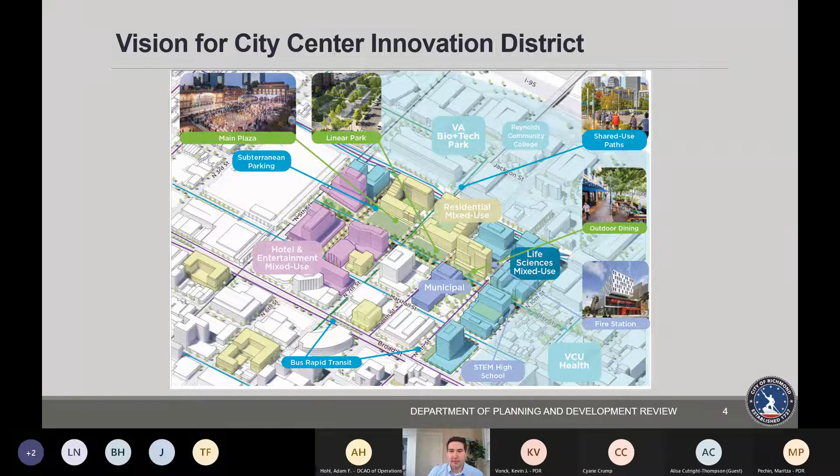I provided some more historical background of the zoning in previous presentations, but it really showed how this area used to be multifamily, but then it got rezoned over the years as we brought in the Coliseum and the Research Park. So really from the 1979 zoning map, this is the same zoning that's been in place since 1979. So it's due for a rezoning.

As I mentioned about the Richmond 300, the future land use plan, this calls for downtown mixed use along the vast majority of the western portion of the study area, which really encourages the mixed use. So you have your residential and your office, commercial, other things of that nature, but a very high density, walkable, pedestrian scaled environment. Going back to the zoning, the CM and the RP districts don't even allow residential at this time. So just changing the zoning to be more in line with the future land use categories of this area was one of our main goals here.

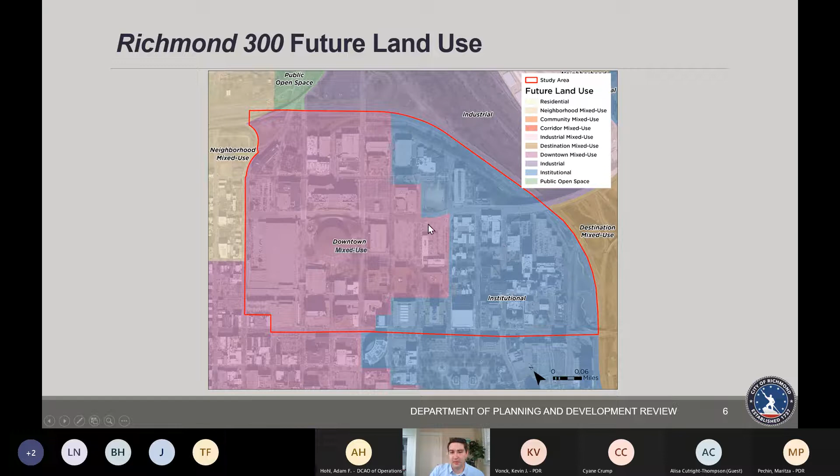One of the first things we looked at as we were developing this plan was what uses were permitted in each of the existing zoning districts. As you can see here up top, here are the main zoning districts that were identified in the existing city center plan, with the exception of the DCC, the convention center. We do not anticipate any changes to that zoning district. So we just included the B4, the CM, the RO3, and the RP.

So we looked at the main uses that are either existing or proposed in the city center plan, and looked at all these boxes that have the P in it, which is the permitted principal use in the district. If it has the green box, then that means it's allowed by right, as long as you can meet some other feature requirements. But if it's not permitted, then it would require a special use permit. So you can see, as I mentioned, in the CM and the RP districts, it doesn't even allow residential at this time.

So we were looking at these uses, and as you can see in the RP, it only allows for commercial as an accessory use. So in those large research facilities, you're allowed to have an accessory convenience store or restaurant, but you can't have a standalone restaurant in that zoning district. So this kind of allowed us to see what is there, what's allowed by right, and what would be done through a special use permit from a use standpoint.

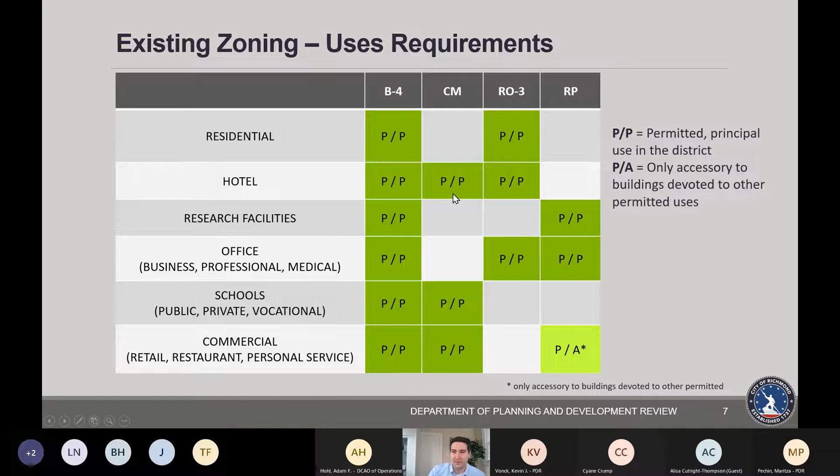But then we also looked at the feature requirements of the zoning district. So four of the main features we thought would have an impact on this area are the height limit, the floor area ratio, the fenestration requirement - that's your doors and windows to allow you to see in and out of the building - but then also your usable open space. That's a relatively new feature requirement that has been added to the zoning ordinance that really encourages usable open space.

So it can be balconies, a roof deck, green space, pretty much anything but building area or asphalt for driving. So these are kind of what we're looking at now.

The B4 has no height limit, but there is the 1-to-4 inclined plane requirement, and it has an FAR of 6.0, fenestration requirements, and usable open space. The CM district has a height limit of 80 feet, but no other feature requirements. The RO3 has the inclined plane, floor area ratio, and fenestration/usable open space requirements as well. The RP, similar to the CM, just has a height limit of 120 feet, and no floor area ratio, fenestration, or usable open space requirement.

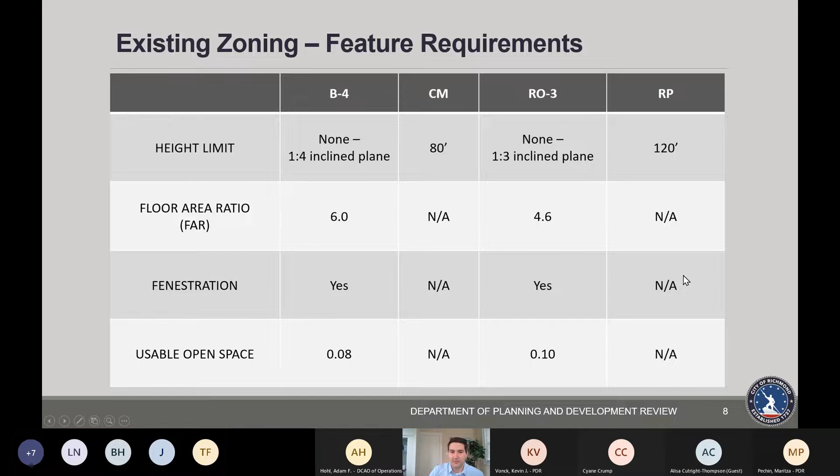When we met back in April, we realized that adding all these uses to the revised RP district, rather than creating a new zoning district as the city center plan called for with an innovation district, made more sense. We had an existing district there, the RP district, the research park district, where if we amended that zoning district to add the uses identified in the city center plan, we could expand it rather than creating a completely new district. The last new zoning district we created was TOD1 for the Pulse Corridor plan, but we didn't have an existing district that met all our criteria then. For the city center plan, we know what uses we're looking for and the feature requirements.

So that was our reasoning for this change. Going back to the feature requirements, this is what we proposed and presented in the first public meeting and also to Planning Commission on April 18th. Our proposal was to have no height limit and no inclined plane, but potentially have a floor area ratio requirement of 8.0, along with fenestration requirements and usable open spaces.

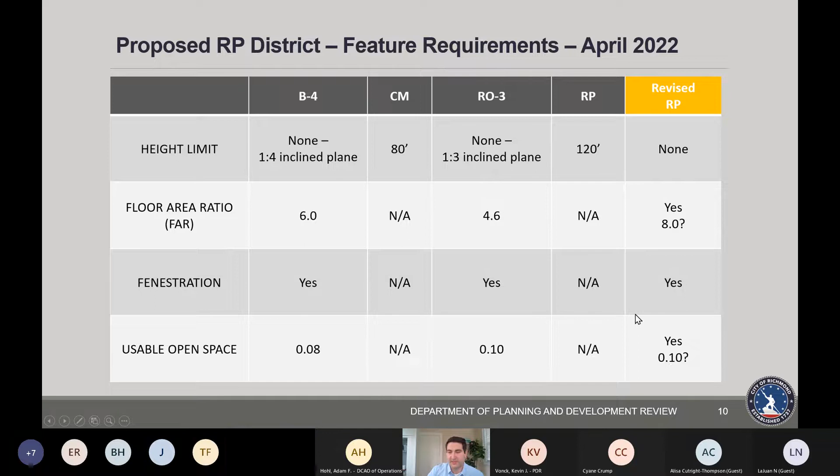We had a survey open to the public from April 13th to the 27th, and overall we had 57 responses with generally positive feedback. A lot of it was, yes, this zoning is outdated and overdue, we need to bring in more mixed use residential buildings. Some comments emphasized not limiting height or density requirements, since this is the part of the city that can handle the most density for that downtown mixed use future land use category.

We heard comments saying don't require any inclined plane or FAR, just let developers design the building to increase density. We also heard support for encouraging the usable open space requirement and allowing by-right developments, since a lot of the CM and RP districts don't currently allow residential, which would require a special use permit regardless. Some comments weren't specifically zoning related but were incorporated into the city center plan, like support for it being pedestrian focused and creating one consolidated zoning district rather than piecemeal districts.

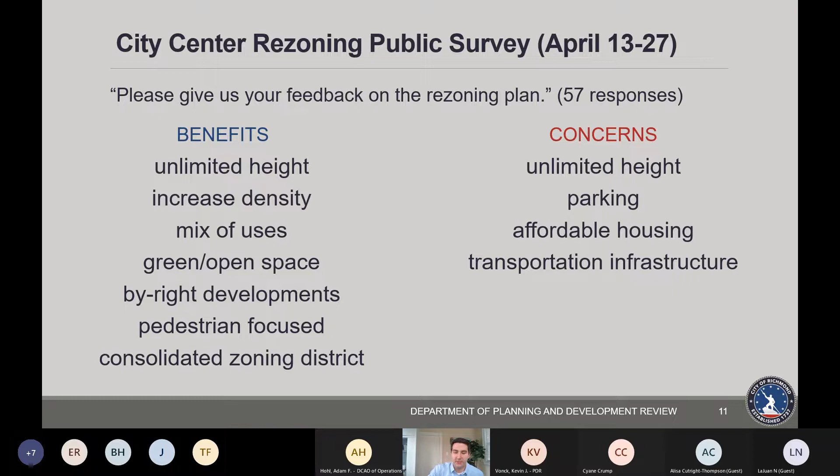After hearing these responses from City Planning Commission and other members of the public, we revised our approach. We kept the same proposed uses to allow in the RP zoning district, but now we're looking at changing the height limit requirement. There will still be no height limit, but we're looking at having a building step-back requirement instead of the inclined plane. We're also not looking at having a floor area ratio requirement anymore, because the city center plan and vision talked about unlimited height, but an FAR requirement technically limits building height. We thought this was a good compromise to allow for additional height while having more form feature requirements, which I'll get into.

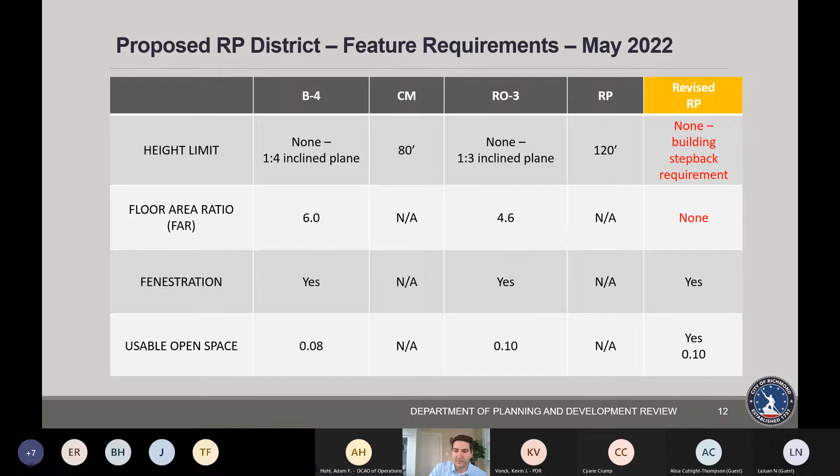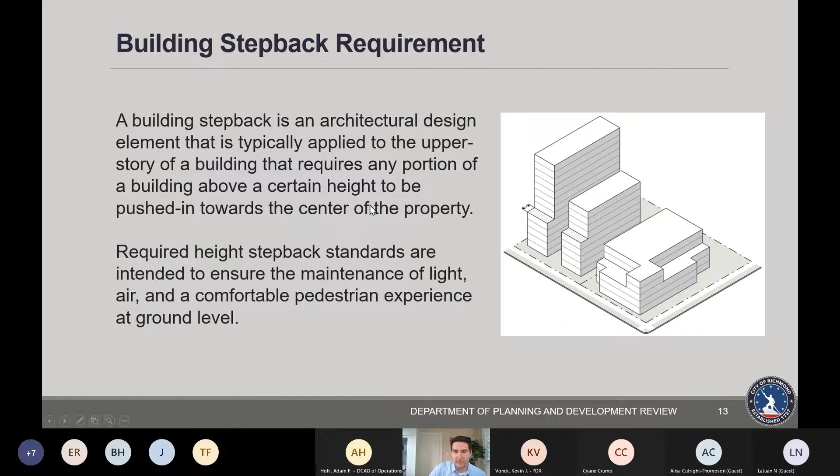A building step back is a little different from setbacks from property lines. A building step back requirement is an architectural design element that typically applies to the upper floors of the building, and it requires you to push the building in towards the center of the property. Going back to the reasoning for the inclined plane, it was to maintain that light, air, and pedestrian feel as well, but this is a different approach to maintaining that light with the building step back requirement instead of the inclined plane seen in the B4 zoning district.

For our proposed building step back requirement in the RP Research Park District, there should be no maximum height limit, provided that height above 7 stories requires a minimum building step back of 10 feet from the building facade line along each street frontage. Such step back shall occur above the ground story and no higher than the 5th story.

So our proposal is that if a building is 7 stories or less, there's no step back requirement. But if you're looking at a building greater than 7 stories, then we're requiring that 10-foot step back, but it has to be above the ground floor and can't be higher than the 5th floor. So you could have your ground floor, then the ceiling, then step back 10 feet, and then unlimited height.

You could do it above the 2nd floor, above the 3rd floor, above the 4th floor, above the 5th floor, but after that, that's where the step back has to be. After that step back, there's unlimited height - you can go as high as you want. So that's what we're looking at for the step back requirement rather than an inclined plane.

Even depending on certain streets, if you were to apply the inclined plane, this would still meet it. But we just thought allowing that unlimited height and not having that inclined plane that could penetrate into certain buildings would increase density and would allow for the vision for unlimited height in the district.

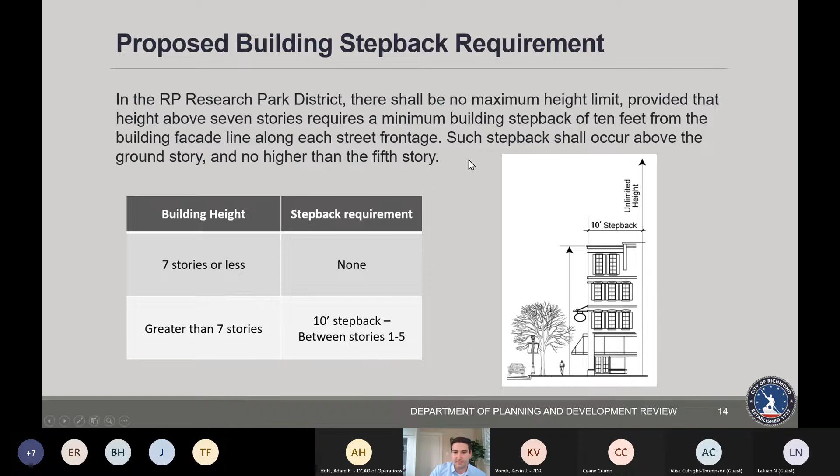Some other additional proposed feature requirements we're looking at is to increase the fenestration requirement along the ground floor. Right now the measurement is taken from 2 feet to 8 feet, and 60% of that building wall has to have windows or doors for the fenestration.

As part of the Pulse Corridor Plan about increasing that transparency of buildings and the fenestration, we're looking at increasing that calculation area between 3 and 10 feet, only along the ground floor. So if you keep it at 60% but increase it to 3 to 10 feet, that will increase the fenestration along the ground floor of the buildings, which we want in this part of the city.

We're also looking at not requiring any parking requirement for any use in the proposed RP zoning district. Right now in the B4, in the TOD1, there's no parking requirements except for dwelling uses, hotels and motels. And in the B4, if you have a mixed use building with ground floor commercial, there's no parking requirement for the residential units. So you could have ground floor commercial and 300 dwelling units, but there would technically be no parking requirement.

So we just thought that by not requiring any parking requirements on our end - if a hotel comes in, they're not going to come in and not provide any parking, but we're going to allow them to determine how many parking spaces they need. Right now in the B4, it's one parking space per 4 guest rooms for a hotel, so more than likely there's more. Even now, our requirement for a hotel in the B4 is not really that high.

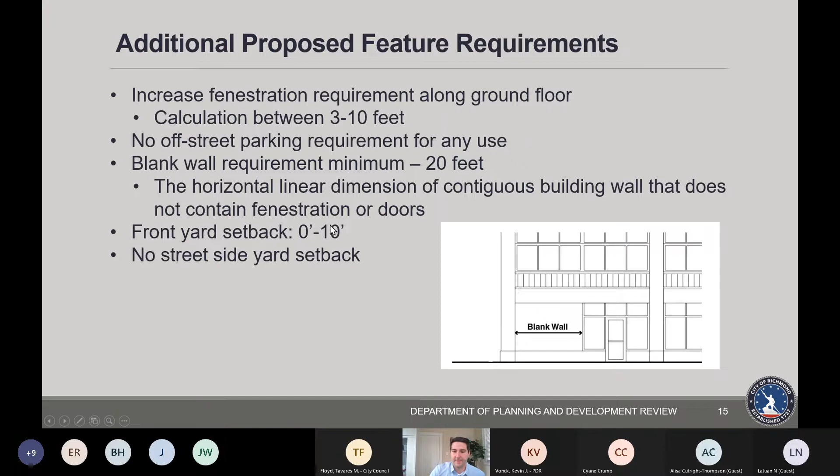I briefly mentioned this at the Planning Commission meeting, but it wasn't fully available for the last public meeting. Another feature in the zoning ordinance and on the zoning map is what we call street-oriented commercial frontages, designated on the zoning map. This is taken from the city center plan, and this is East Clay Street. Hopefully when we bring it back up to grade, this is like our festival streetscape, so we really want that street-oriented frontage along the entire street here, with the large outdoor green space area for public gathering.

For these street-oriented commercial frontages, if it's a multifamily building along the street frontage, it requires another permitted principal use in the zoning district. We wouldn't want ground floor residential units where people often have their blinds closed or windows dark - we really want that ground floor activation. So when these street frontages are designated, it requires that activation by not allowing residential units along the ground floor.

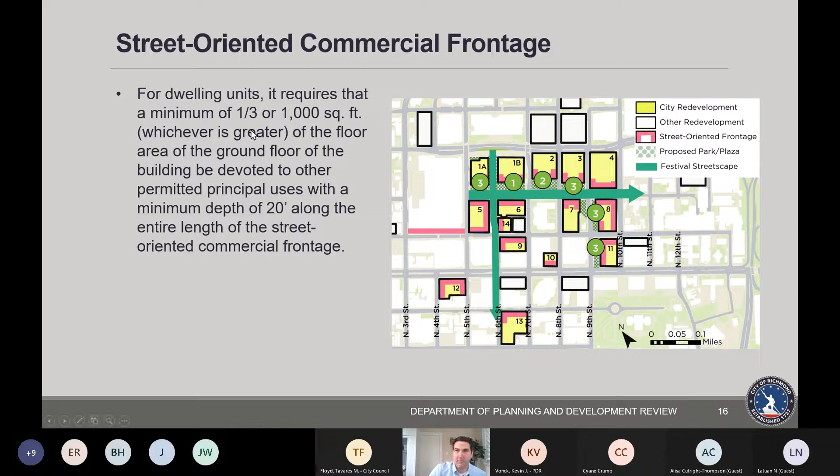In addition to street-oriented commercial, we have a different designation called priority street frontage, where that doesn't have the other permitted principal use requirement, but it prevents access points for parking decks. If there is a parking deck along that street frontage, it requires another permitted principal use. Going to downtown, you see a lot of street frontage where the entire frontage is just a parking deck. So when we identify these priority streets, any new construction requires a different permitted use along that street, so you don't just have a blank wall of a parking deck.

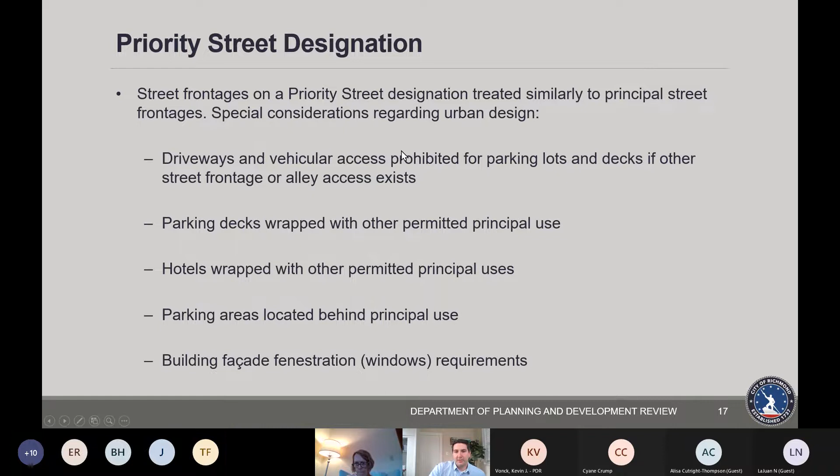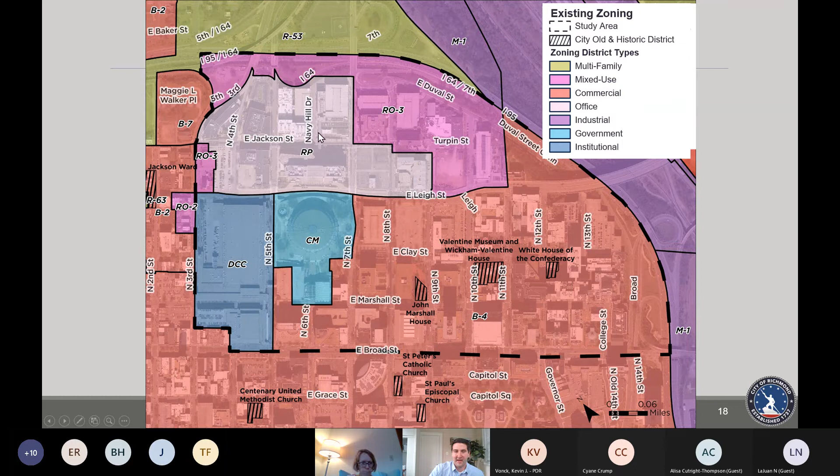It also has some requirements regarding hotels, and fenestration requirements as well. Going back to the existing zoning before I go into our proposal - here's the RO3, the RP, the CM. These do not allow for residential now, but the future land use calls for downtown mixed use. So with those RP amendments I described, we're looking at expanding that RP zoning district throughout the entire planning area, except for downtown or the convention center, to keep that the downtown civic and cultural zoning district.

There's also a little portion here along North 3rd Street that was RO3, but we thought it would be good - we looked at those uses and they're small office uses, and a 3-unit building there. We thought keeping that as RO3 may be a good buffer between 2nd Street and the Jackson Ward area.

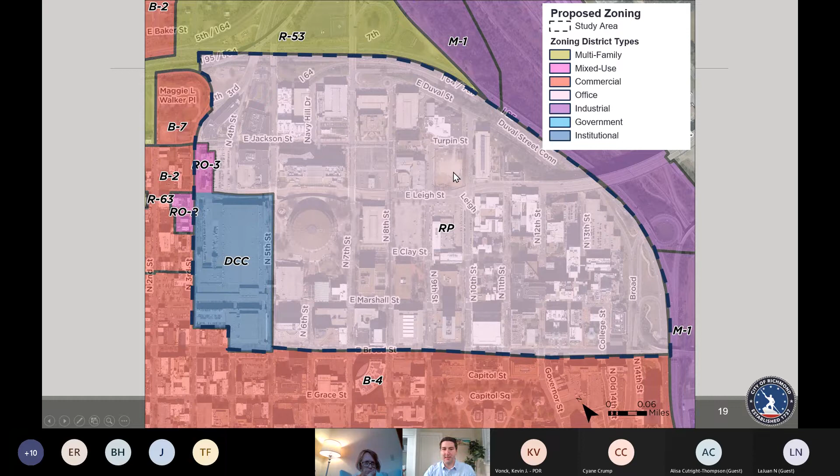With that expanded RP district, bringing in the street-oriented commercial and priority street frontages I just mentioned - along the southwest here, outside the study area and partly inside it, you'll see we have some existing ones. These dotted lines along Broad Street and Grace Street are existing. You also have some in the study area along North 6th Street and East Marshall - those are existing street-oriented commercial, and these lighter yellow lines are existing priority street frontages.

Within the study area, these yellow lines are streets along North 7th, North 9th, North 11th going north to south, and then East Marshall, East Clay, and East Jackson Street - those are all proposed as priority street frontages, not allowing parking decks or entrances along the street frontage, plus fenestration requirements. We're also looking at creating street-oriented commercial frontage, not allowing residential units on the ground floor all along Clay Street, hopefully opening it up, bringing it to grade all the way to North 5th Street to create that festival streetscape mentioned in the city center plan.

So these are the proposed street frontages for the city center area. We're also looking at extending the priority street frontages and street-oriented commercial requirements along Broad Street, because right now it stops at North 9th Street - just continuing that down to Broad Street towards the interstate.

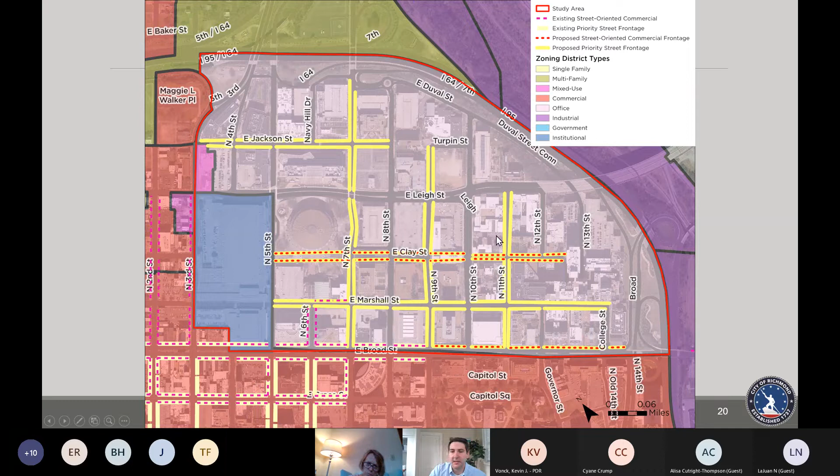So our next steps - we're going to gather any comments, whether it's tonight or over the next few days.